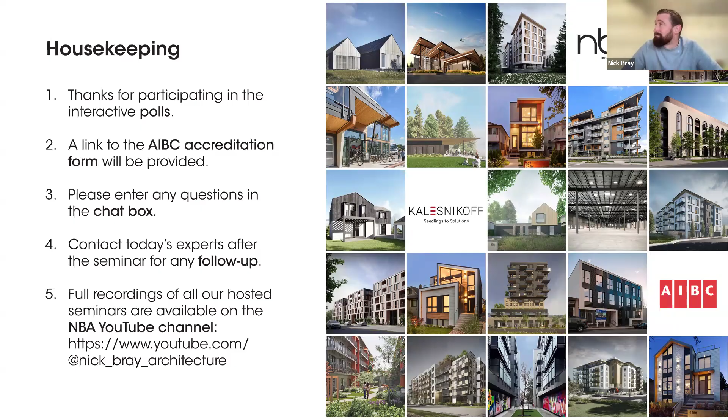Thank you so much for the introduction, Nick, and thank you everybody for joining us. I'm going to give you a brief introduction and then I'm going to pass it on to Devin. He has a very strong engineering background and he's going to be able to dive into the technical details.

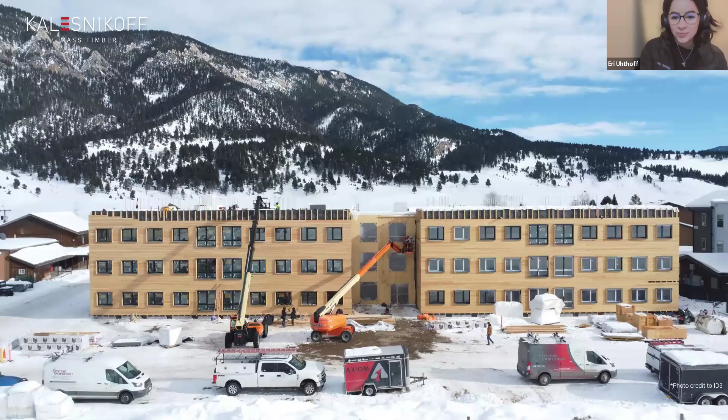So I'm sure most of you are familiar with Kalesnikoff. From seedlings to solutions is basically our way of saying that we go from cradle to gate. We're one of the few manufacturing firms that are fully vertically integrated, and that will have a lot of relevance later on in our explanation of our offsite construction systems offerings.

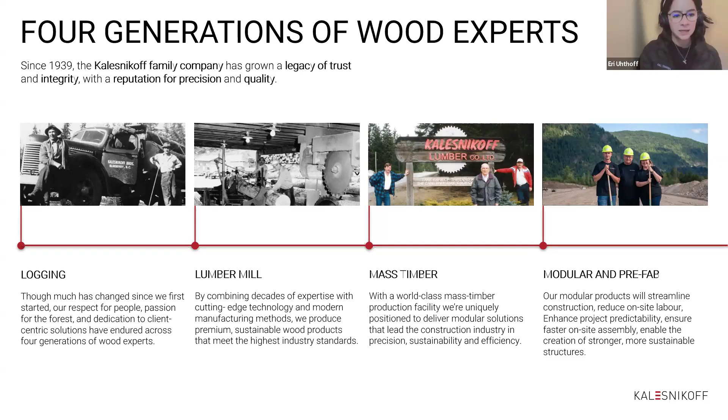So we have been around for quite some time, more than 85 years, and the company has had a very organic evolution that has grown alongside the industry. We started as a logging company back then in 1939. We then moved to a lumber mill, which we still own. 6 or 7 years ago, we started into the mass timber industry, and just last year we had the opportunity of opening up our newest facility, which is fully dedicated to modular and prefabricated systems that we're going to unpack later on in the presentation.

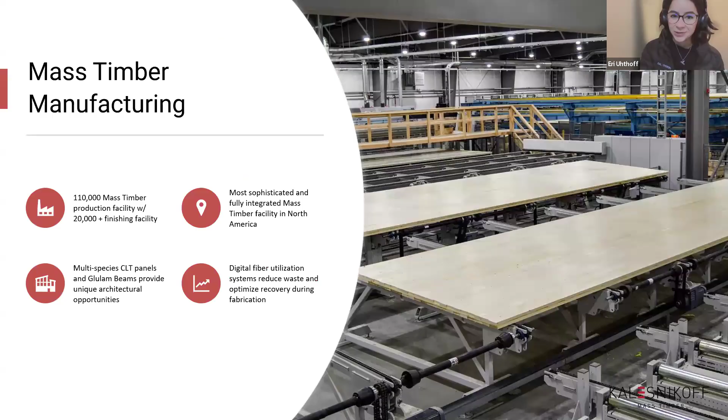A sneak peek into our mass timber facility. This is where we run our main products.

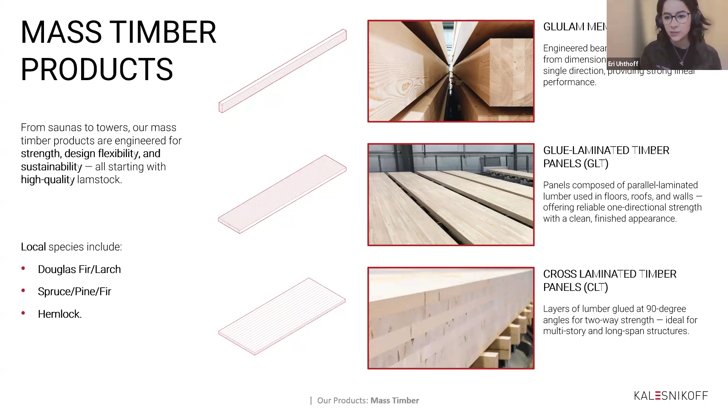We're talking about GLT, CLT, and glulam members in a wide variety of species and dimensions. All of these products are certified to use whatever we have available in terms of fiber basket, what we call the fish of the day. Whatever is inside the sandwich is what we have access to. Although we do provide the option of selecting a visual face and the stress grade to match your structural performance requirements.

That introduction, I'm going to pass it on to Devin. He's going to dive a little bit more into the DFMA and why it's so important.

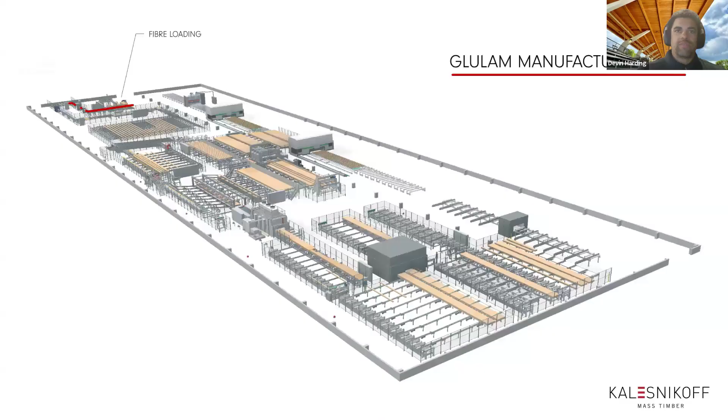Thank you, Eri. So as mentioned, I'm going to go through design for manufacturing and assembly. As Eri mentioned, we have specialized and purpose-built manufacturing facilities for our value-added wood products. This means we're able to add specific value to the wood fiber before it leaves our facility and make it customized to your specific project prior to it arriving at the construction site.

Everything goes through a pretty unique path to get through our manufacturing facility. And with our specialized manufacturing equipment, it changes the way that you want to design your buildings and your projects to get the most value out of what we have to offer.

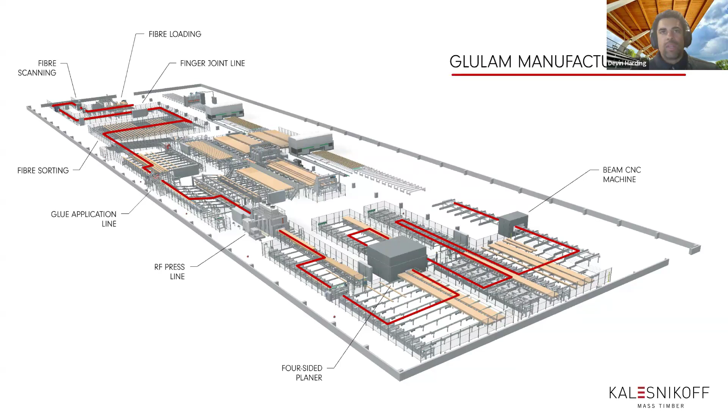We have a variety of different CLT and glulam layups that can be utilized in different projects. However, not all of them are the same. So what we want to do is optimize the panel selection for your specific project to ensure that you're getting the most out of the fiber for what you are trying to produce.

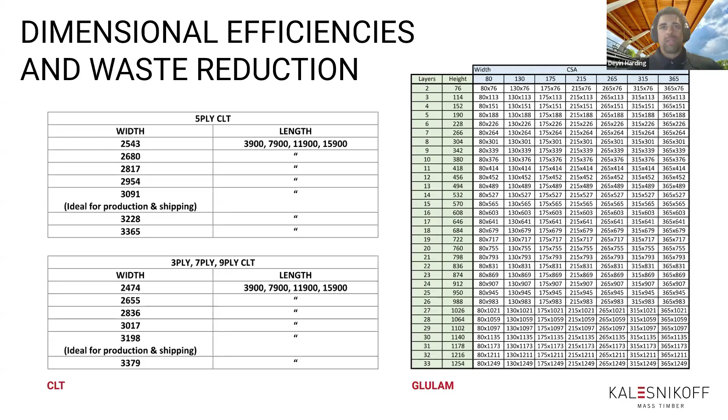On these tables, there's a lot of different items to select on top of the visual characteristics and the species you're going to be working with in your CLT and glulam. When it comes to manufacturing, we have certain abilities to exceed site-applied labor with the equipment we have, and we want to explain those in great detail as to how to get the most out of the manufacturing facility.

This comes down to a few different elements and key pieces of equipment that we have in our facility that add value and make your components project-specific, detailing what has been provided in the design. One thing we'll say is most of our products are designed around a maximum length of 60 feet.

Design for manufacturing and assembly somewhat leaves out the other important aspect of transportation. When you're dealing with manufactured products, you need to take into consideration the transportation cost as well, based on different load requirements. We can build our panels up to 11 foot 4 inches wide, but that has different implications with different transportation routes and site accessibility. So we want to discuss that with our clients and make sure they understand the trade-off of one-time transportation cost additions versus long-term programming requirements of the building and what some of these different spans can use.

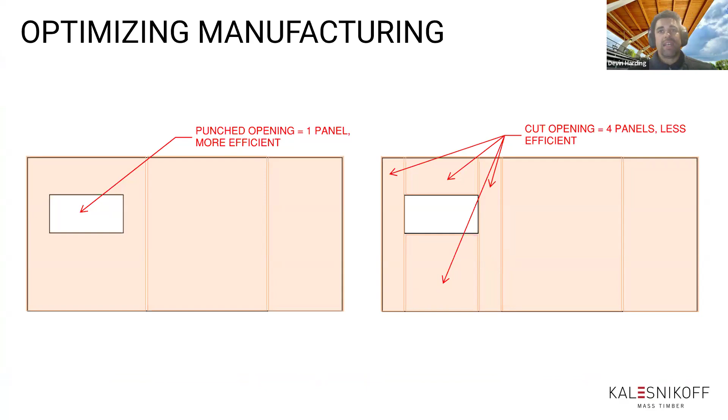Additionally, we have CNC elements that are able to integrate labor more accurately based on the model that's been provided. This allows us to help lay things out in the 3D space and execute them in the physical space with precision. That does bring some understanding of how this is going to happen in terms of panel sizing and layouts.

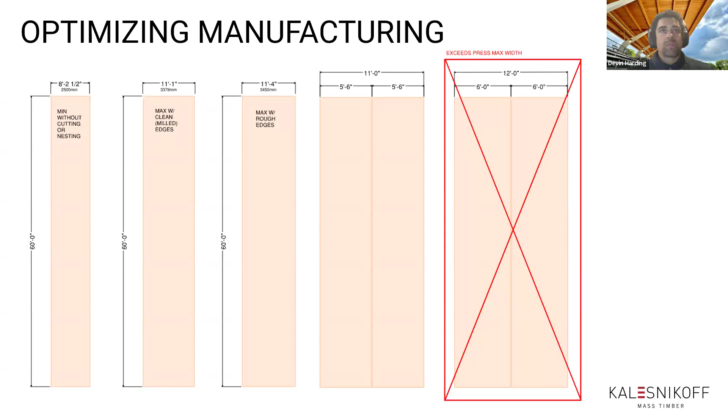What we want to do is make sure we design each panel to be as efficient as possible, with the fewest amount of long-term, lengthwise cuts that happen on a specific panel, to ensure we are creating the most efficient panel layout. Sending the same amount of volume through the press once is a more efficient way to produce our CLT. So making sure that we are not requiring two smaller panels to achieve a 12-foot width is important.

Here you can see we've got different combinations and layouts of different penetrations happening on a CLT panel. One thing to understand here is how the CNC actually works. Whenever we're able to limit our CNC work to one side of the panel, it actually increases the efficiency because that means we have to do fewer panel flips.

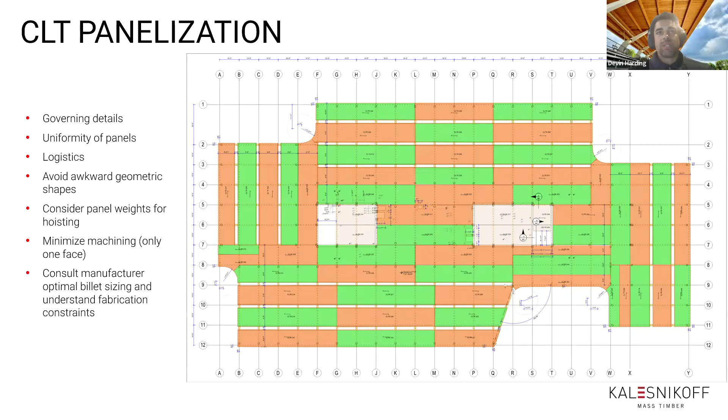That has implications in terms of how these panels are delivered to site and how they're pressed, whether we're pressing the visual face or the bottom face as they're being laid out in the overall building assembly. Understanding those pieces can help do a different project layout by optimizing the panel sizes with all of this previous information, as well as the layouts of how they're going to be used to meet the geometric shapes.

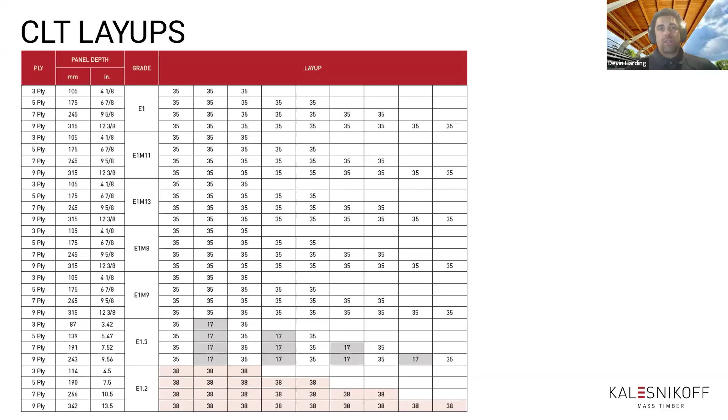Additionally, you can see that we have well over a dozen CLT layups that can be utilized, and sometimes balancing a stronger but thinner E-rated panel might be more cost effective than going with a larger volume V-rated panel. So working with all of these elements with the full breadth of manufacturing in mind really helps you to understand what kind of decisions need to be made and how to lay out the project differently.

Additionally, glulam connection details is something that can sneak up on you in terms of how many combinations can be done in a specific building. This slide shows different connection details that can be deployed for a column base and the different amount of times required to do a very similar connection detail.

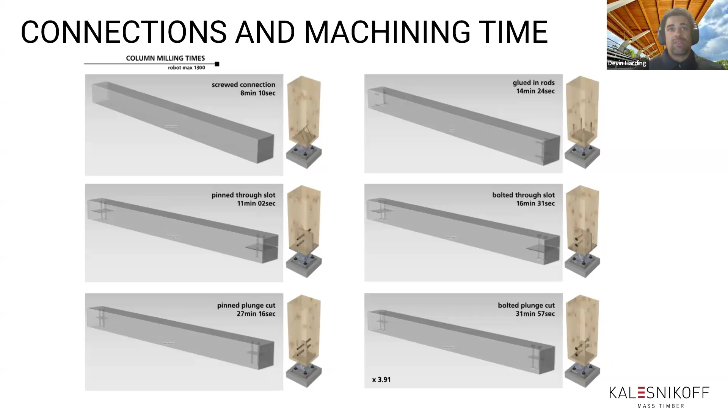What this shows is if you have 1,000 columns in a project and you're able to save upwards of 20 minutes on each individual location, you're able to save a significant cost to the project. This difference in cost comes from different toolings that are applied on the CNC machine, how many times you have to change your tool as you are doing a specific connection detail, and the efficiency of that tool, how well it works to achieve that.

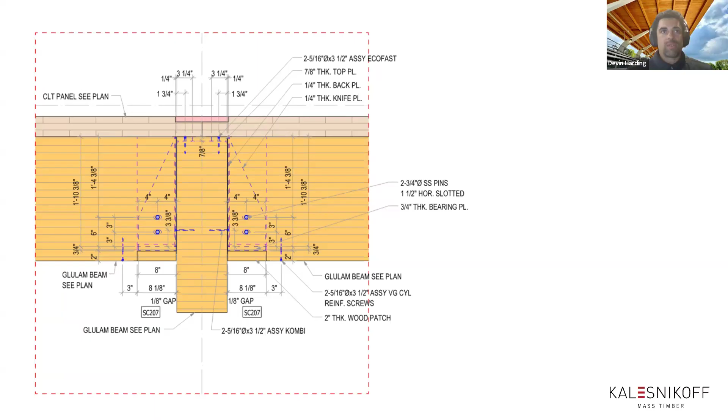Going through that and understanding all of those things is a critical part of making sure that you've designed something for manufacturing. Additionally, one thing that can be very helpful is coordination with several other trades with our structural assembly. We can coordinate that in the digital space and then execute it on the CNC to allow for other trades to work more quickly on site.

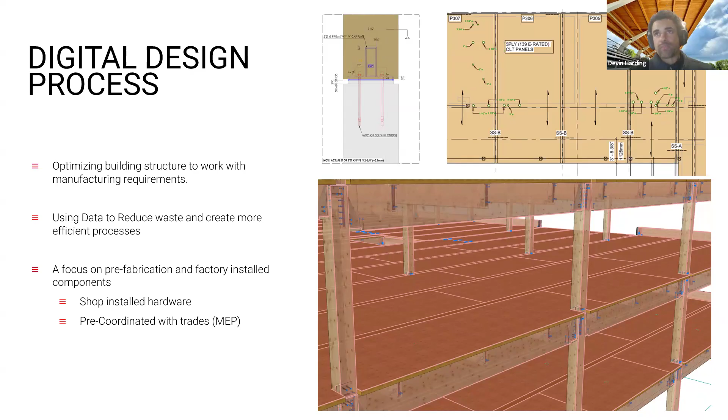When we're taking that into consideration, it allows different mechanical and electrical trades to evaluate where things are going to go and actually move to installation more quickly because the layouts are already established in the digital space.

We also can look at each individual glulam column to beam connection and review what kind of connection is going to be most efficient, be it a locator pin or a type of screwed connection, and how those bearing connections can operate.

Eri, you can take on the modular. For sure. Sorry, I was having trouble unmuting myself.

We have a few modular considerations that are worth taking into account during your design process. As Devin mentioned, our panels can be pressed up to 60 feet in length, but when we're talking about a modular approach, we do have some optimal sizing that not only takes into account how our shop is laid out, but also the transportation regulations that he just mentioned.

So on that note, our optimal length would be around 40 feet. In terms of width, we would like to maximize the CLT press width, so that takes us to around 11 feet 4 inches, and that could be your maximum interior clear width, allowing you to mount the walls on the outboard of the panel. In terms of height, that is very closely tied to transportation regulations.

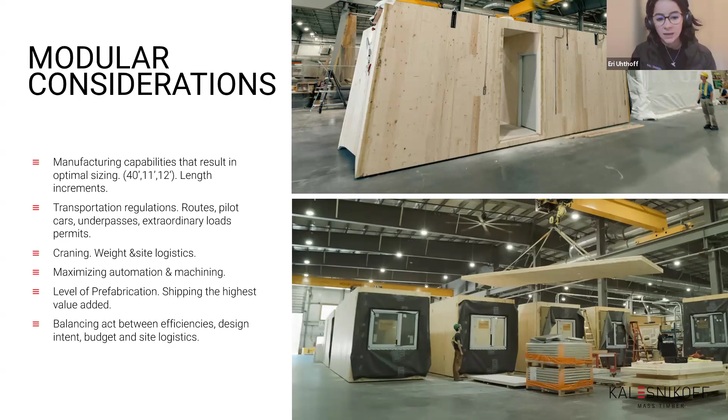With that, we have identified some early design considerations that drive efficiency up. Again, having your construction typology in mind when you start your design process is key. Having all of these DFMA principles integrated into your plans is also a key driver for efficiencies. Keeping your layouts as repeatable as possible allows standardization to actually shine. Most of these items might seem a little bit obvious, but in practice, when those are not laid out as your grounding principles, they can sneak up on you as well.

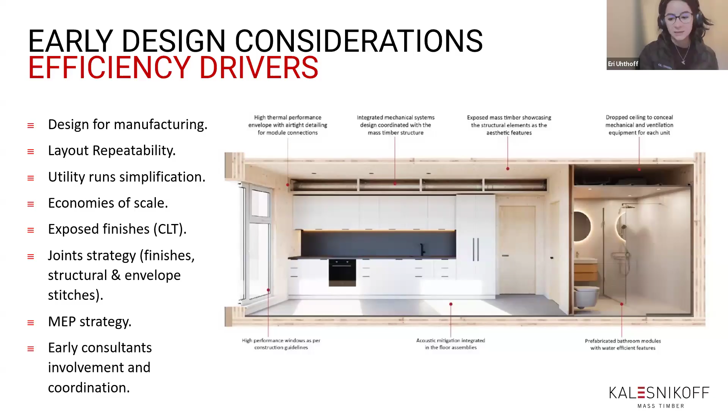So utility runs simplifications, having economies of scale at hand, whenever you can utilize mass timber and leave it exposed, that allows you to utilize its structural potential as well as its aesthetic potential. And keep in mind your joint strategy when stitching not only the structural portion of your system, but also the finishes. When all of these factors are combined during the early stages of design, that allows for a more successful project, which takes us to our model for success highlights.

These are some of the key factors we've identified from previous experiences. There needs to be a shared mindset within the project's team of shifting a good percentage of decision making way earlier into the design process, which is very different from a traditional construction approach. The whole team has to be on board and understand that working with prefabricated elements is a front-loaded approach, not only design-wise, but also schedule-wise and financially too. So this whole timeline shifts to having most decisions made during the pre-construction stage.

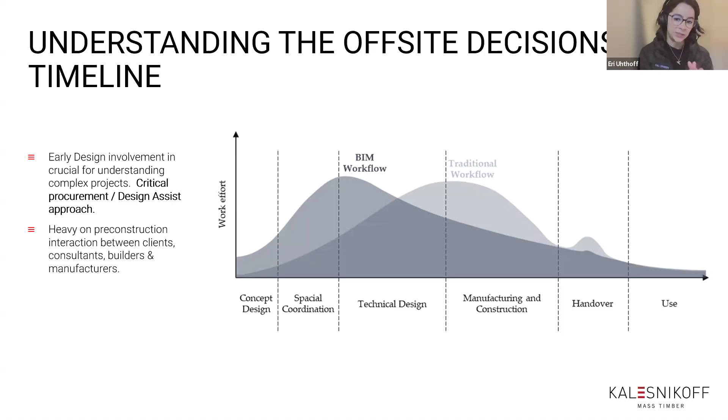The ideal timeline to get your manufacturer involved is, of course, from day one, but we know that's sometimes not realistic. So we'd suggest ideally from 50% schematic design onwards. Once you have your general objectives and program defined, that's when we can provide the most value to your design process, providing all of the elements Devin just talked about.

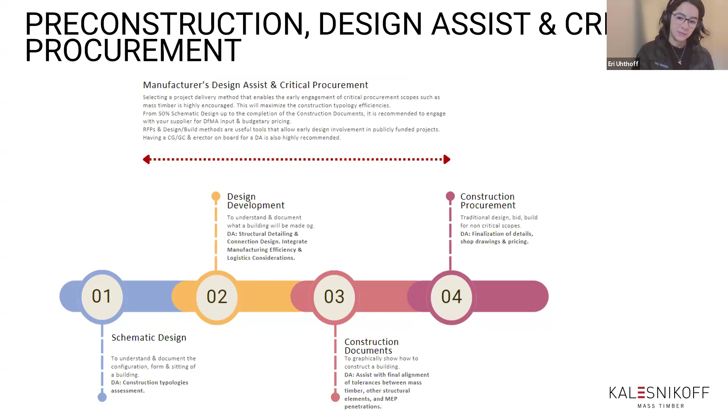So this would be our ideal workflow, having us engaged as early as humanly possible so we can provide this DFMA input that will reflect also in your connection design. One of the things mass timber manufacturers are best at is having a broader vision of how to integrate all of the other disciplines and how to collaboratively work with all of the trades to make their life easier on site.

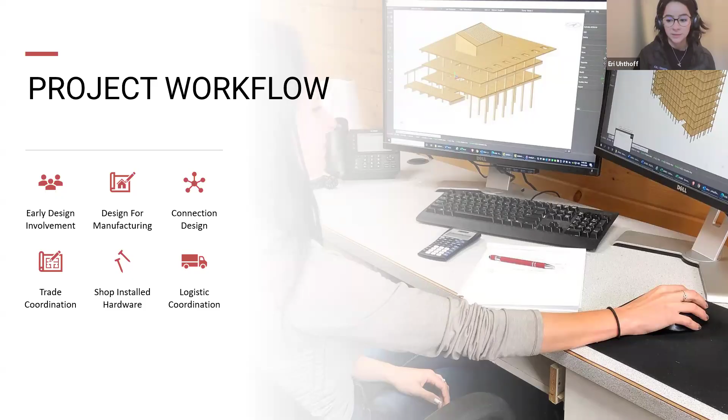In terms of the digital realm, we all know BIM isn't an option anymore. Especially when you're treating your project as a compilation of systems, there's a high level of coordination that needs to happen within disciplines, and having everything within a federated model helps you do that.

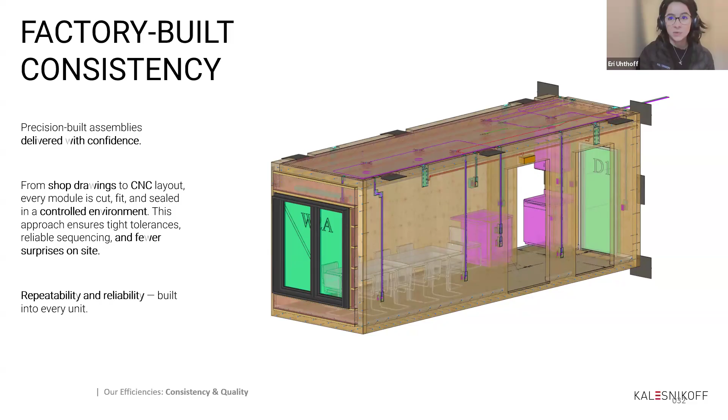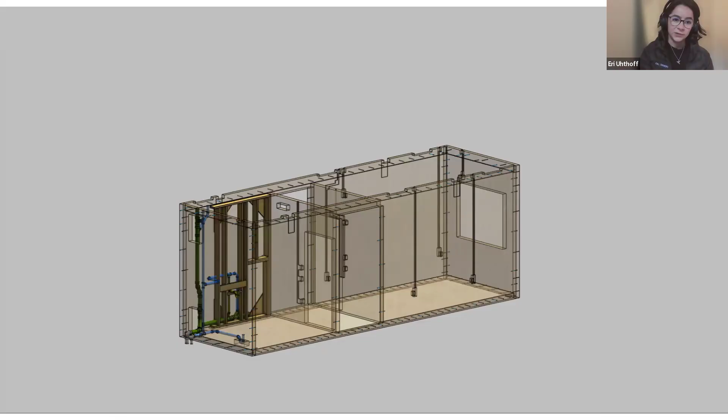In terms of our process, we model everything in-house to a very high level of detail. We're talking about LOD 400 upwards, which allows us to identify any potential value engineering options and make sure all of the parts are interacting with each other properly. And we do that not only for a modular approach, but for all of the other components we're able to manufacture, including panelized systems as well.

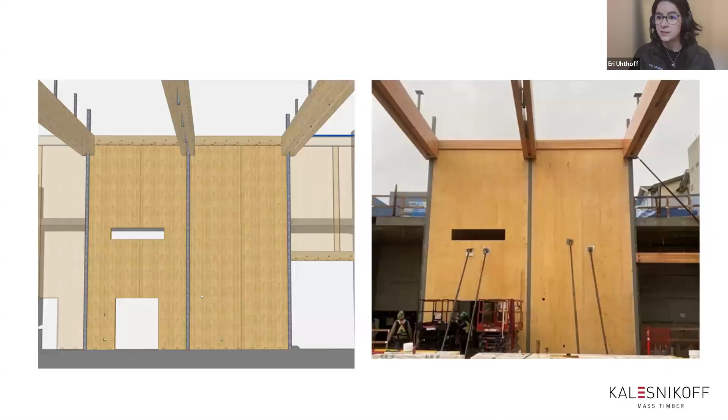This is a real life example of how our 3D model compares to a project on site, and how we can make the most value out of it.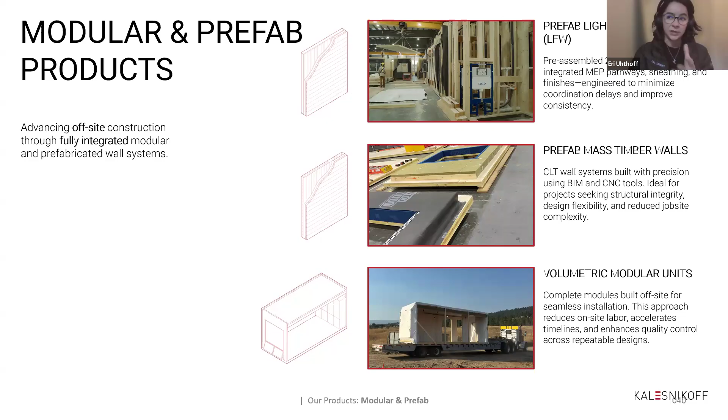Understanding how to manage your prefabrication scope is also going to provide you the most efficiencies. Not all projects are made for a fully volumetric modular approach, so usually what makes the most sense is to combine modular and panelized where it makes sense. In our particular case, we have quite some flexibility for manufacturing different systems. So for prefabricated walls, we can either use CLT as a structural base or light frame, and then where it makes sense, integrate all of that into fully volumetric modular units.

When all of this is implemented correctly, meaning having your key players involved way early on during the design process, then you can achieve the promise that prefabricated systems can deliver. We're talking about mainly a 30 to 50% faster delivery, 10 to 20% lower costs material-wise, tighter tolerances that come from a very highly automated manufacturing process, and up to 60% in waste reduction.

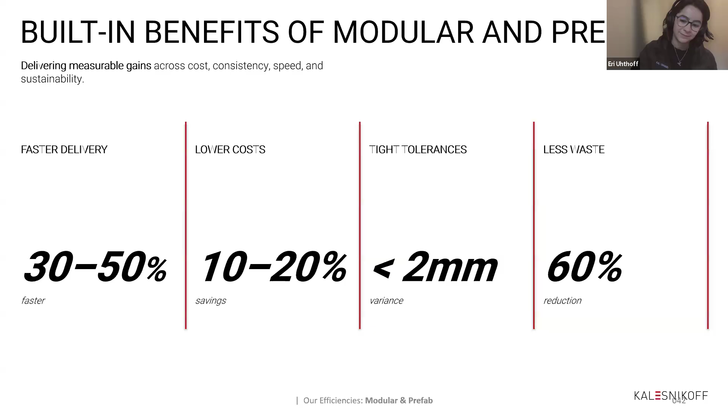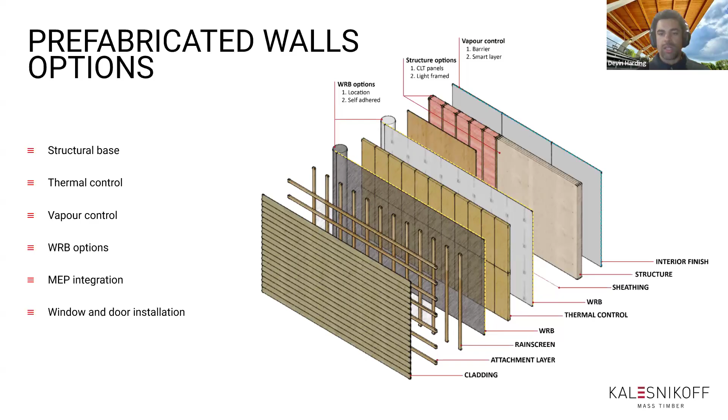So I'll pass it on to Devin for the prefabricated walls. With prefabricated walls, we have two different offerings, and we'll go through a few details on both. We offer both a light wood frame and a CLT base for the walls, as well as various optional pricing and services in terms of weather barriers, insulation, and other integrations, all the way up to exterior cladding on some projects when the design is adequate.

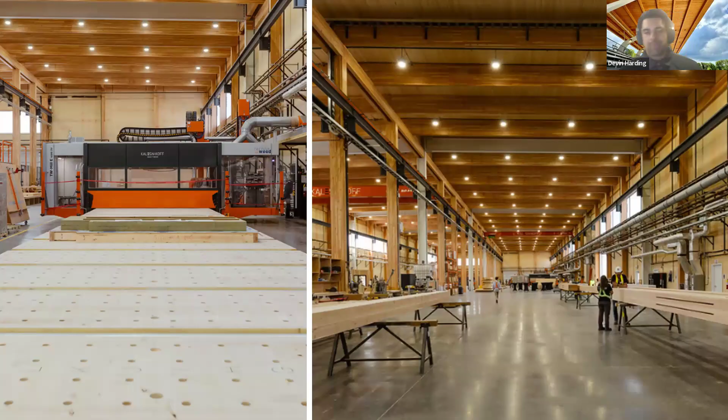One thing is that we have a very adaptable system. It's been designed to allow us to integrate several different wall assembly details to meet the project's requirements, rather than having a prescriptive wall assembly requirement.

The piece of equipment that you see here is called a Technowood wall line. It has several of those elements that I discussed earlier in terms of manufacturing capabilities to bring those industrialized practices to your construction projects.

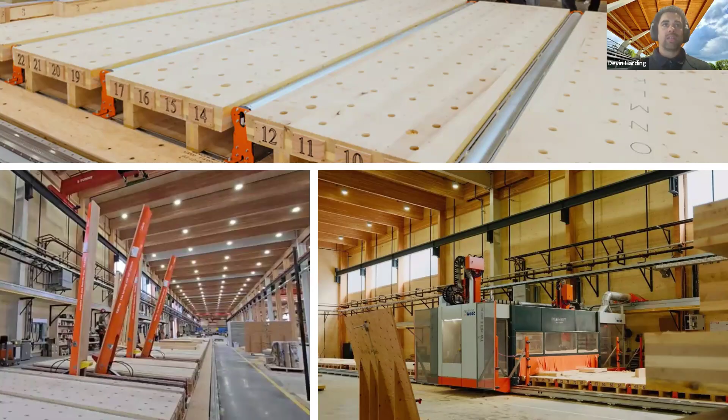You'll see the various locations along the panel layout that show different layouts. Those all translate to a digital layout in our modeling software, ensuring that everything is done effectively. Additionally, you can see that we have overhead cranes as well as panel flipping equipment to allow these panels to be worked on from both sides as required to meet the assemblies.

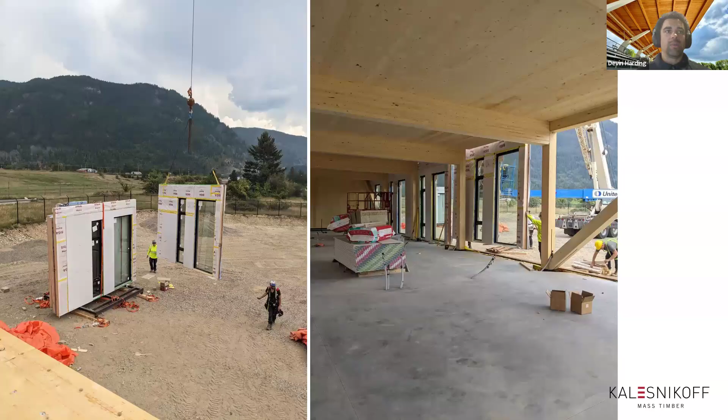The last thing that system does is it actually has a nailing and wall trimming gantry system that allows us to ensure every opening and panel is built to the exact specifications required by the project, not only to the dimensions, but things like fastener layouts and spacings to meet these engineering requirements.

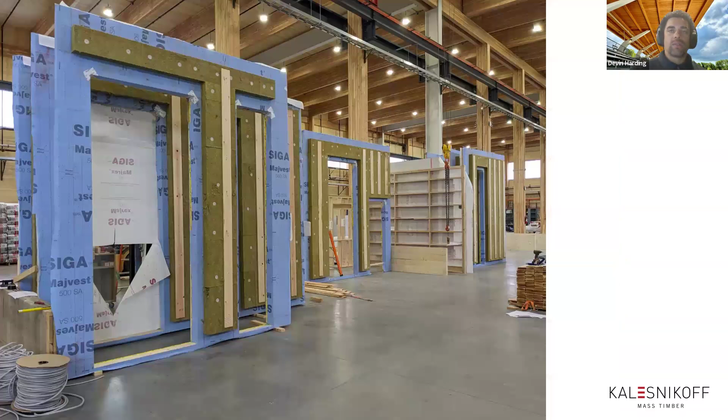With that, we're able to create a wide range of prefabricated wall panel systems that can be delivered to site with a number of different elements integrated into these panels. You can see here where we have windows integrated into these panels, as well as drywall to ensure that the fire rating behind some of the pre-installed structural elements will be achieved with the final building.

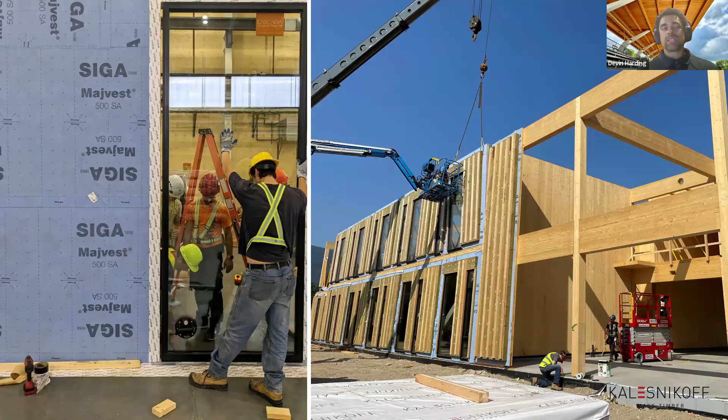We can also work to include various different types of exterior membranes and insulation to meet the project's thermal requirements. You can see here panel layouts can be broken down into different sizes based on project specific requirements. So when we look at how we're going to produce each panel, we consider not only manufacturing efficiency, but the transportation, logistics, and installation considerations to make sure that we're getting the most value out of what's being offered.

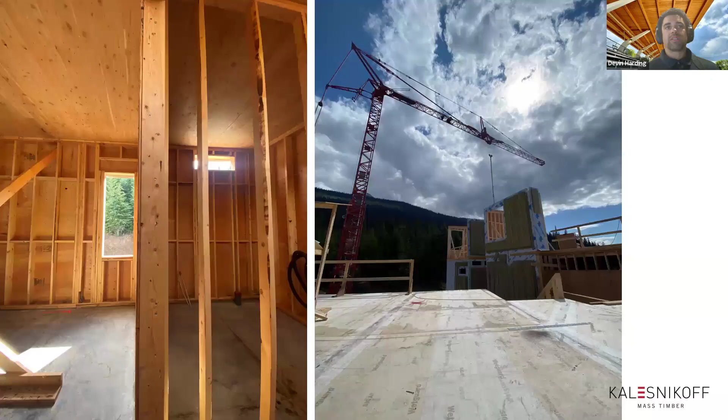Again, we have specialized equipment to allow us to do things like window installations, and we're working at ground height when we're doing a lot of this execution, which makes it a safer work environment rather than having to work off of lifts on site when you're dealing with heavy windows.

Oftentimes, tower cranes are used to install other elements, and so you can repurpose those to work with your wall panel system. Again, this is something that's brought into consideration during the initial design stage to make sure that panel weights are in line with what size of crane and its reaches will be required.

And you can see here, we'll start to look at weatherization and how to make sure that we're properly protecting the different wall systems and floor systems before they're brought to site.

Here's a unique element on this specific project where it had the raked walls. That is an element that's worth discussing in that it's less efficient to manufacture, but creates the programming space that was required by this specific project. We were able to produce it because the amount of time it would have taken on site was actually greater than what would have been required to do in the facility.

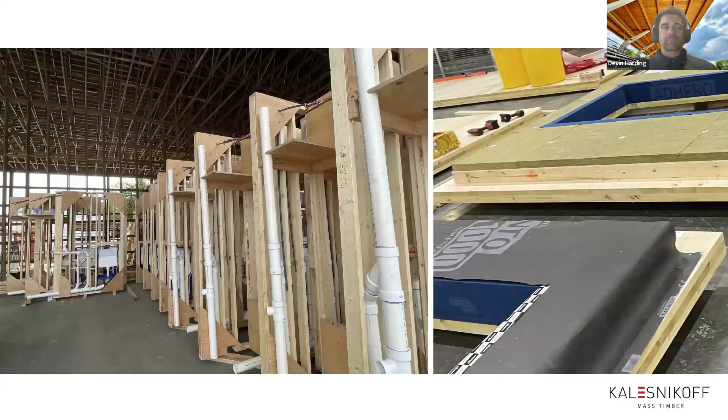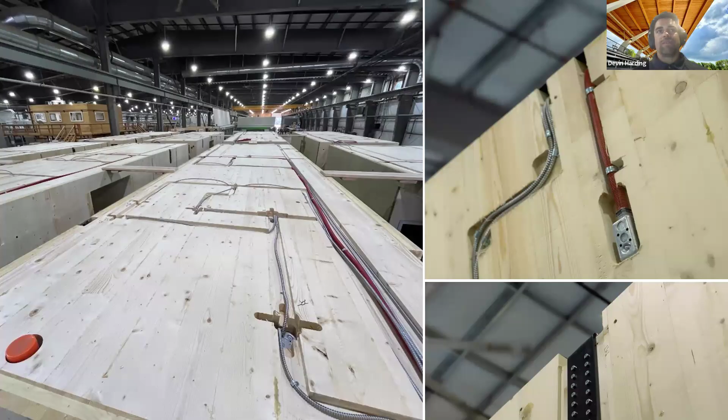So with this, repeatability is going to be a key element. What we want to do is create a large stock of repeated components, and then we can standardize that production. We are then able to use manufacturing practices to get more value out of each component that we manufacture, utilizing jigs and other elements to hold things in place and create a more efficient structure overall.

Again, we'll be coordinating with both mechanical and electrical trades to ensure that as we go through the different layouts, we are incorporating penetrations and other allowances to ensure that they are laid out effectively and meet the project specific installation requirements, planning for both what's going to be happening in the facility as well as on site to create the aesthetic and the open exposed mass timber elements as required.

This one shows how we can integrate different elements into a single project to ensure that we're using the right material for the right location. Sometimes a CLT wall might be effective on one side, but a light wood frame might be more effective for hiding some plumbing chases and things like that. So we can utilize those different wall assemblies within the same project and make sure that we're achieving the needs of the project. Again, having the two different substrates for our wall assembly allows us to integrate different acoustic partitions.

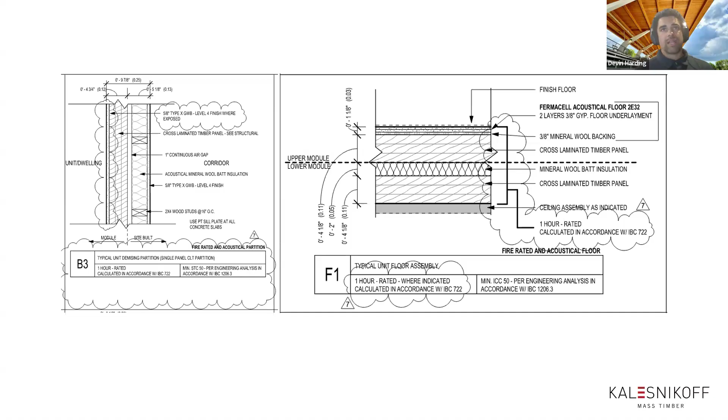There are several tested and listed wall assemblies and acoustic performance assemblies that can be utilized. And what we'll work with during the initial design consultation and discussion is establishing what's going to be the right balance between what can be applied in the manufacturing facility versus in the field for different wall and acoustic performance pieces.

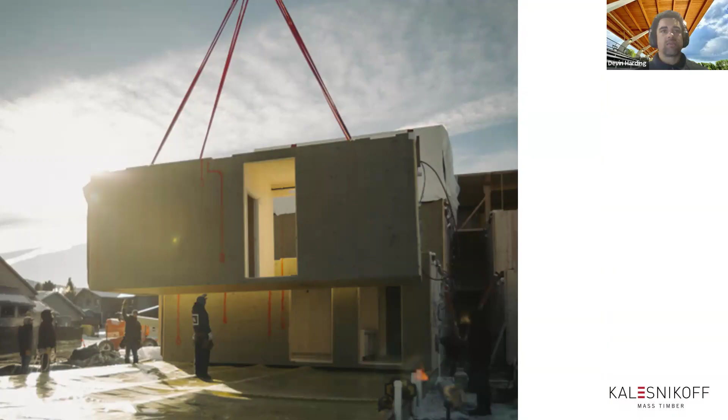Here's an example where we installed the acoustics to the roof to achieve what they were looking for, as well as the floor, and then left the mass timber exposed. We can also apply exterior insulation in between CLT panels to ensure that we have the appropriate acoustic and fire rating for that specific project. And we'll work with the architect of record to establish what is the best wall assembly for that specific project.

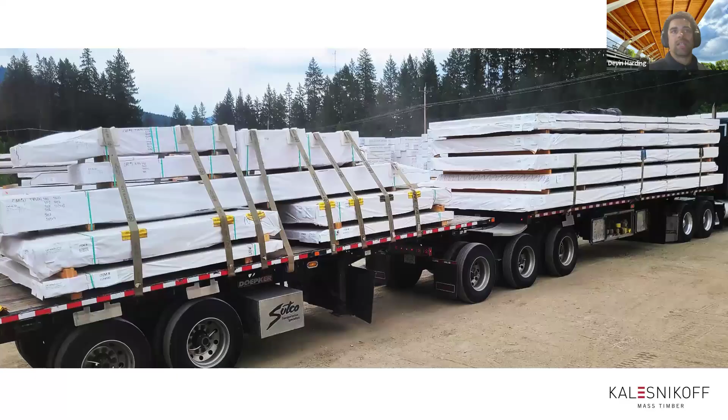Moisture mitigation is something that needs to be considered as we're doing any mass timber or any prefabricated project, because we are creating a finished product and sending that to site for integration into the project. So we have several stages. We'll have the pre-transportation prepping, so we'll wrap all of our glulam and CLT products before going on to the truck.

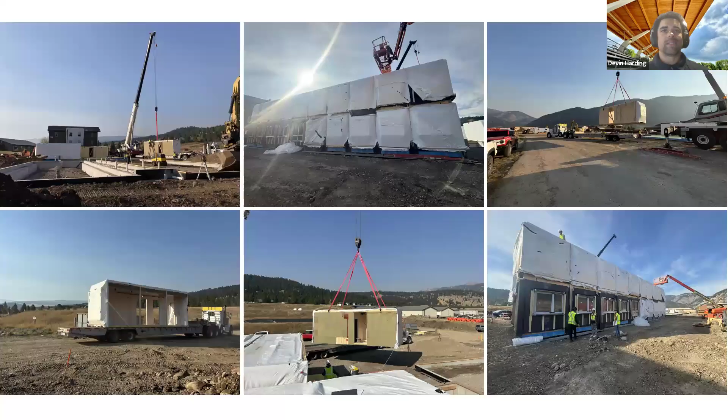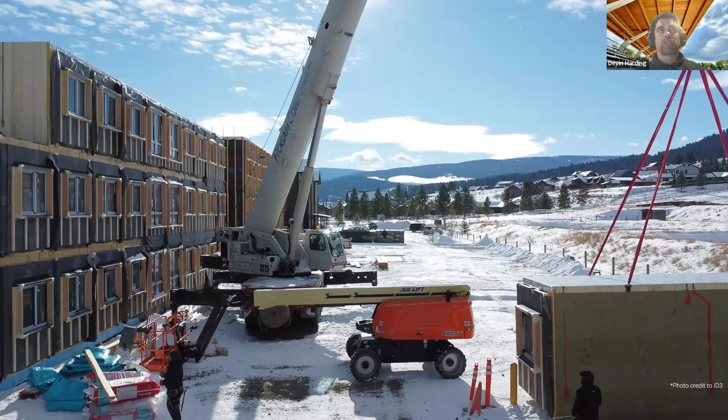Additionally, when you're dealing with modular construction, sometimes a temporary shipping membrane as well as shrink wrap should be applied before it gets delivered. This ensures that you're protecting that finished look with a proper system that can be removed on site prior to installation or at the right time with installation. Sometimes you can leave some of the elements in place to ensure that during construction, until the final roof is installed, they're still being protected. You can see here that temporary roof membrane being applied to the top of the module, as well as the final air vapor barrier system on the outside to create a weather tight module that's waiting for final completion of that roof system.

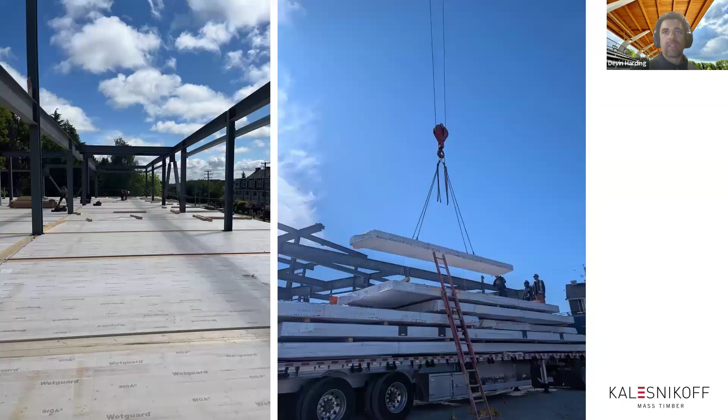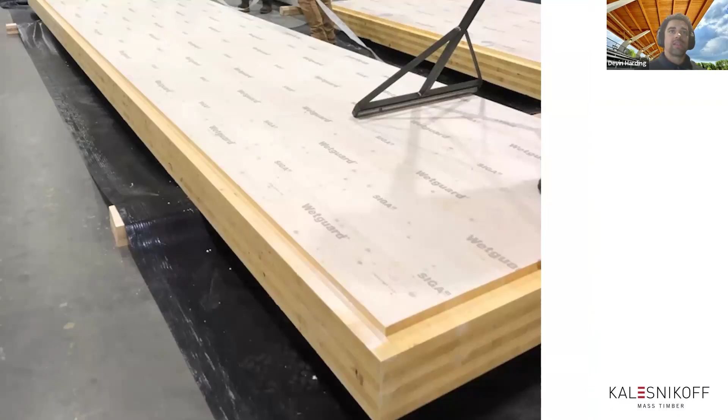Scope delineation is key for that - what's going to be happening in the facility versus on site. Obviously, with a CLT panel, there's a lot of surface area that would need to be covered on site. So integrating that into the facility, and having a roll of additional Wetguard to cover the spline locations, allows these panels to be protected throughout construction.

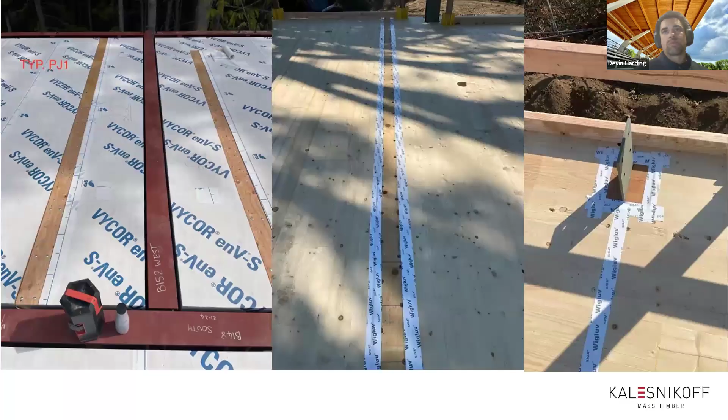But different sites require different levels of moisture management. Sometimes seam tape is all that's required to prevent water from getting through to the visual face. So we always encourage working with the installers and the general contractors to understand a comprehensive moisture management system, not just what will be applied in the facility, but what's going to be applied on site, how it's going to be removed, and the overall performance and protection that's going to be provided there.

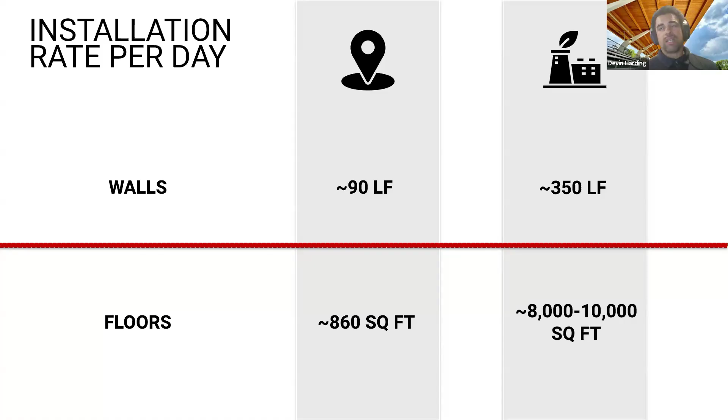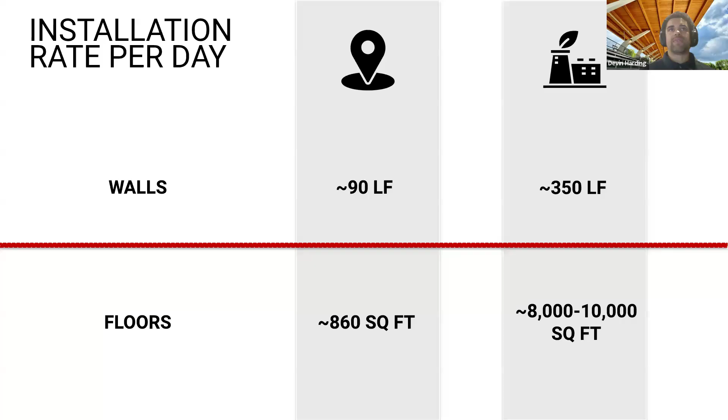In terms of speed of installation, it really comes down to how the walls are panelized and laid out. We've seen a number of different successful CLT floor plate installations of 8,000 to 10,000 square feet of installation a day, and then an equivalent amount of light wood frame walls installed in the subsequent 2 to 3 days, and in some instances, even a 2 floors per week installation rate. It comes down to availability of crane on site and number of workers that will be there to do these installations, as well as fastening details. All of those things in the installation schedule allow a lot more performance with fewer people actually on site, ensuring a safer work environment.

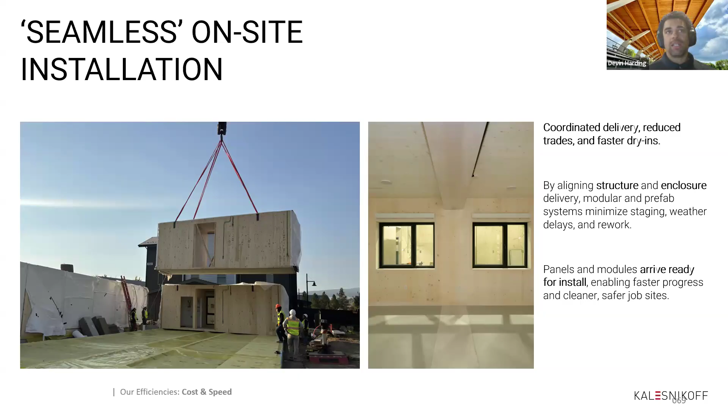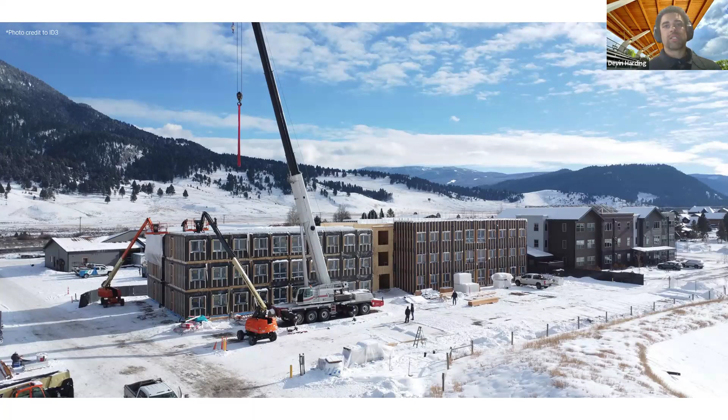As Ari showed earlier, all of these elements are being modeled for final installation on site. So we are confident in the way we've produced everything with consideration of final site conditions to be delivered, and that allows modules to be placed in a more efficient manner. We've seen installations happen of as many as 20 modules a day, attributed to the CNC precision of the manufacturing, but also the top-mounted connection details that reduce the amount of time installers need to deal with straps. This allows projects in remote locations and adverse weather conditions to be installed very quickly and with high efficiency.

Additionally, with the CNC and other equipment that we use in the facility, we have the confidence that everything will line up with what's been designed in the digital space and line up with what will be produced on site, with some obvious precautions taken to ensure that site conditions are made to the design and translated back to what we've produced. But this allows us to overlap the manufacturing with what's happening on site and reduce the overall project schedule by 30 to 50%, which can be very advantageous, especially to places where you want to start getting a return on investment right away, reducing general conditions costs and other elements like that.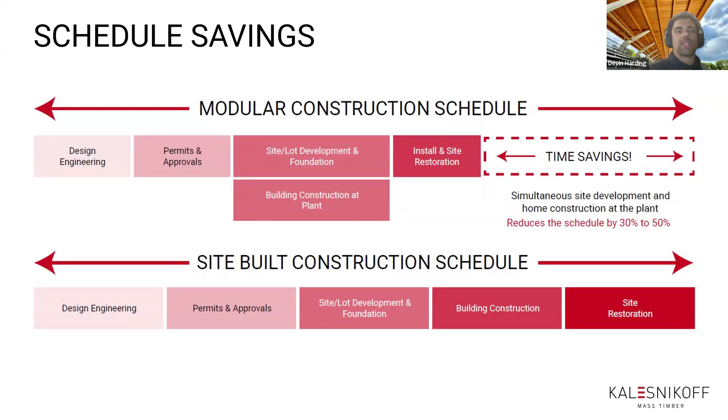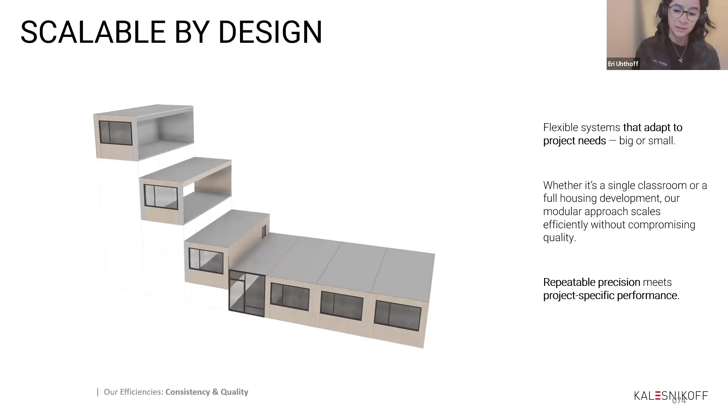Okay, so just to wrap it up, scalability and hybridization. These are two principles that we strongly advise including during your design process. The more repeatable your layout is, the more efficient it's going to be for us to manufacture, and the higher potential it's going to have to be replicable in different projects down the pipeline.

And of course, we are pushing to get the most of each system, which means its implementation should be understood correctly. So how can you make the most of the mass timber properties in terms of structural performance, and how is it best to combine it with traditional systems such as concrete and steel to make the most of both worlds?

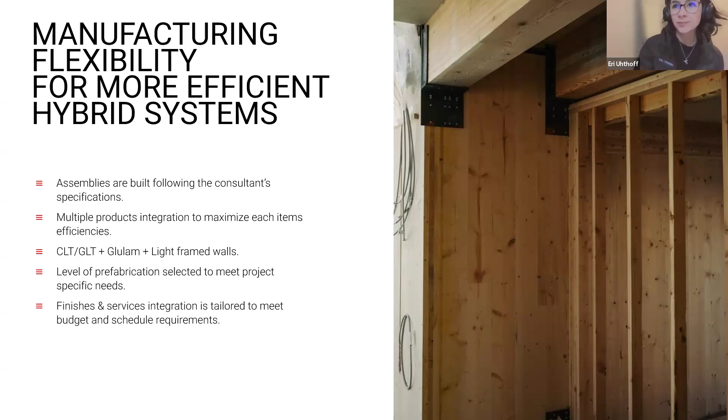So the possibilities are endless as long as the systems are implemented properly.

Yeah, Devin, any final words? I think there's a couple of questions in the chat.

Yeah, absolutely. Well, thank you very much for this presentation, that was really, really interesting. I think we can have a conversation now, and I do encourage those of you listening to ask any questions at this point. Put them in the chat box.

We do have a question here from Juliana to start with: what is the tolerance to moisture, especially considering a rainy city as Vancouver during installation?